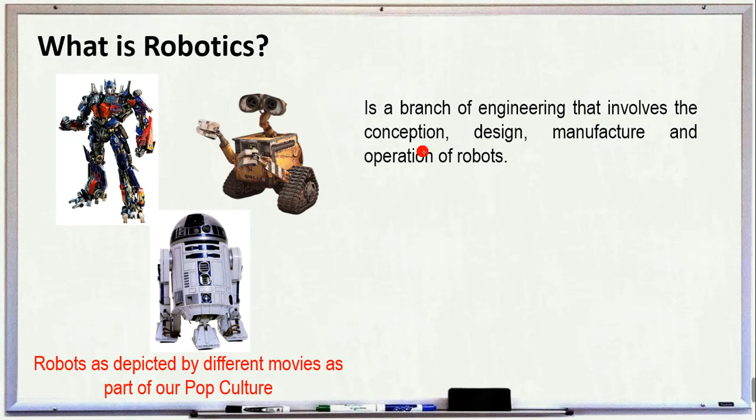But in an academic perspective, robotics is defined as the branch of engineering. So bago na siya, this is an emerging field. It is a branch of engineering that involves the conception, bali magplano, mag-conceptualize unsay porma sa ka robot, and then after conception, proceed ka sa design. So imo i-design ang iyahang mechanical structure, and then of course since most robots are electronics na siya, so imo pod i-design ang iyahang electrical systems and electronic systems as well as the control systems.

And after the design, if it is approved na, okay na siya, then proceed ka sa fabrication or pag-manufacture sa mga parts and also the assembly. And afterwards, of course, for the operation of the robots. So, ang kaninga field, mo niyang buhaton: the conception, design, manufacture, and operation of robots.

And the objective of the robotics field is to create intelligent machines that can assist humans in a variety of ways. So, in the early days, humans discovered and invented machines in order to make things easier and faster, unlike before nga manual ra kaayo, then very tiresome. And then kaning sa robots, very complex na, no? These are complex machines integrated with other fields like mechanical, electrical, electronics, computer systems, and so on and so forth, and also the control systems, so that mas mo unsa man mapataas pa iyahang level of intelligence.

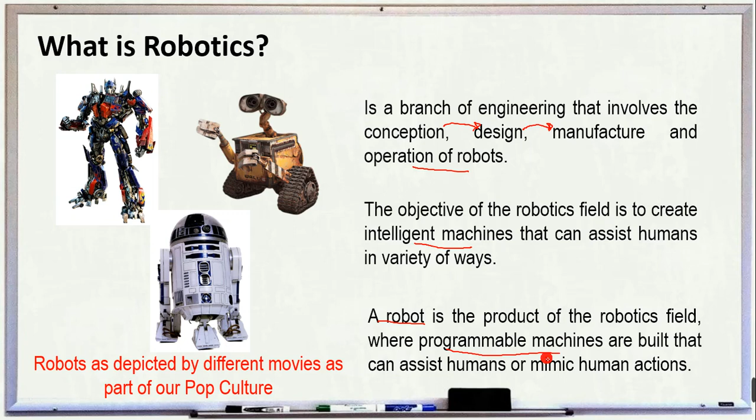So next, we already finished defining robotics. Let's proceed to the industrial robot. Actually, industrial robot is also one of the products of the robotics field. But industrial robot is very specific in the field of kanang manufacturing and in the industry.

That is why it is defined by the Robot Institute of America as a programmable multifunction operation for handling mechanical parts or workpieces. So, ang mga mechanical parts and other kanang mga workpieces, they are present in a certain manufacturing firm or in a certain industry. So, ang trabaho sa usa ka industrial robot or a special mechanical device that can perform various tasks, a wide range of task. It could be pick, then i-drop.

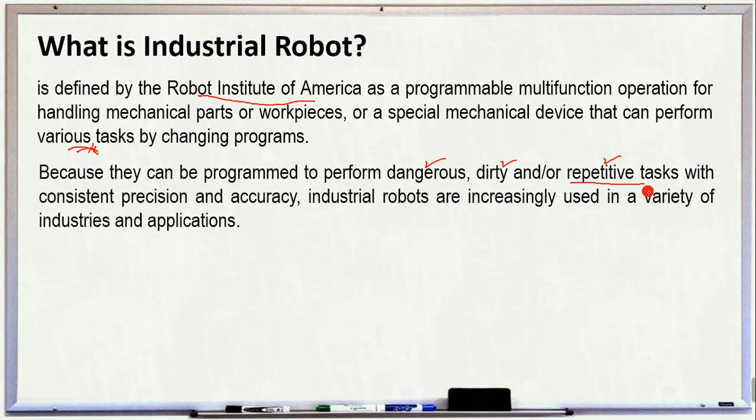This is not efficient for a human mindset, but for an industrial robot it is easy because it has no emotion or feelings. As long as it is given instructions, it will execute them again and again, as long as it has power and no damage to its parts.

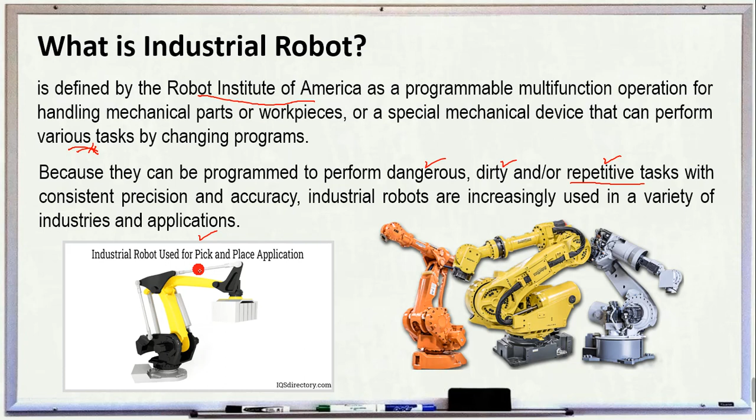Next, let's discuss the history of robotics. Although this is an emerging field, if we trace back its origin, it dates around 3000 BC, because around this era, mechanical devices were built to regularly carry out a particular physical task.

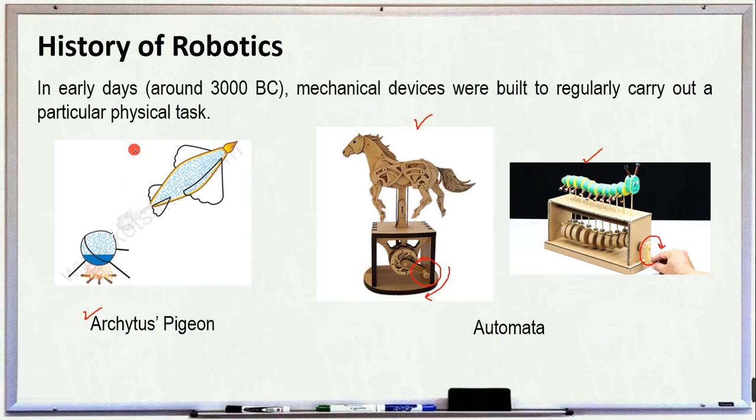So, diri ta sa modern era. In 1961, the first industrial robot by George Devol was invented. It is named as Unimate.

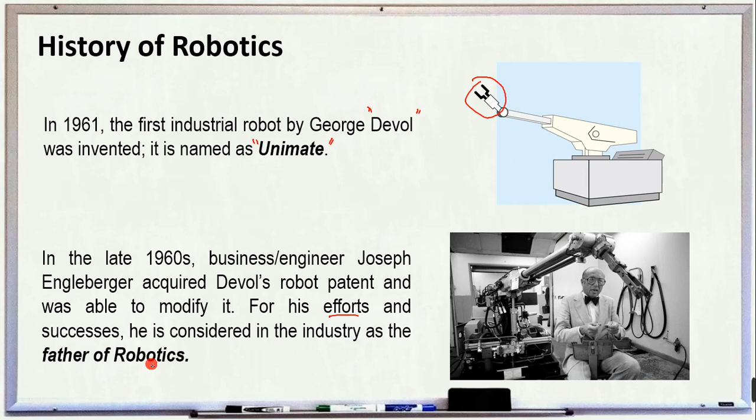Next, in the next decade, after that, si Charles Rosen from Stanford Research Institute led a research team in developing a robot called Shakey. Again, from Unimate, another discovery is Shakey. Si Shakey, mas advanced siya.

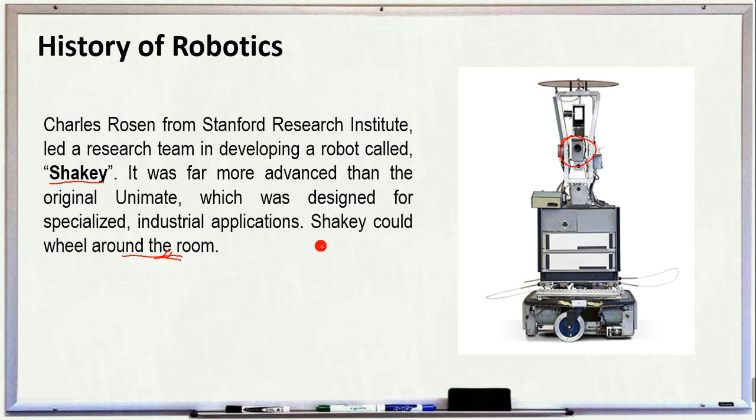So moving forward, proceed ta sa types of robot. So di ba? Usa sa mga example ato na discuss si industrial robot. That is for the industrial applications or in a manufacturing firm. But let's have another types, no? Daghan man siya. First is

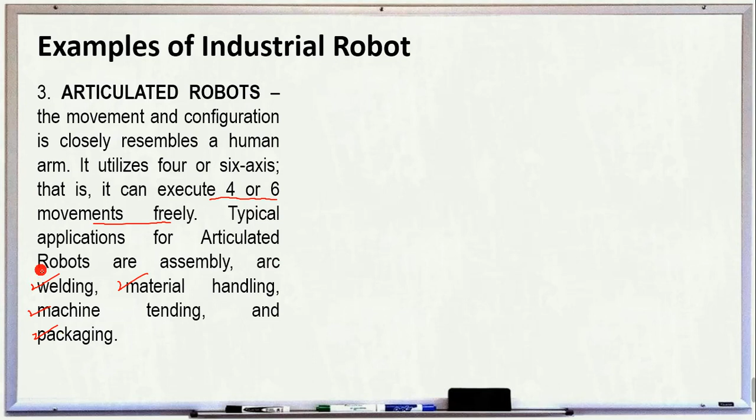Okay, six. So one is translational, and it's both translational and rotational. What are its typical applications? Since it has high degrees of freedom, it can be used for arc welding, material handling, machine tending, and packaging. You can position it anywhere because it has many degrees of freedom, just like our hands which have many degrees of freedom.

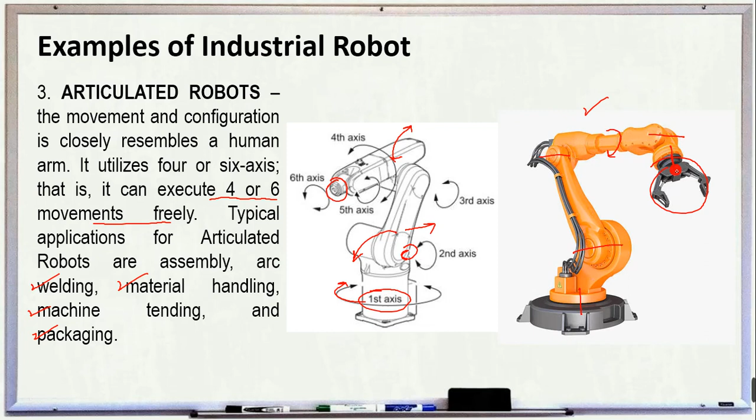Fourth, we have cylindrical robots. This one has a rotary joint at the base and a prismatic joint to connect the links. This prismatic joint's movement is translational only, meaning linear only.

So there's only two, because in cylindrical axis, all you need is the r, the theta, and also the height. So we have rotation, and we have a rotary joint, and a prismatic joint to connect the links, so that is our r dimension. Another translational dimension is the z dimension.

That's why it's called the height of the cylinder. So again, we have rotation, and we have two translational movements - that's for the radius or its extension, the extension of its arm, and also the height of the robot, which is the z-axis.

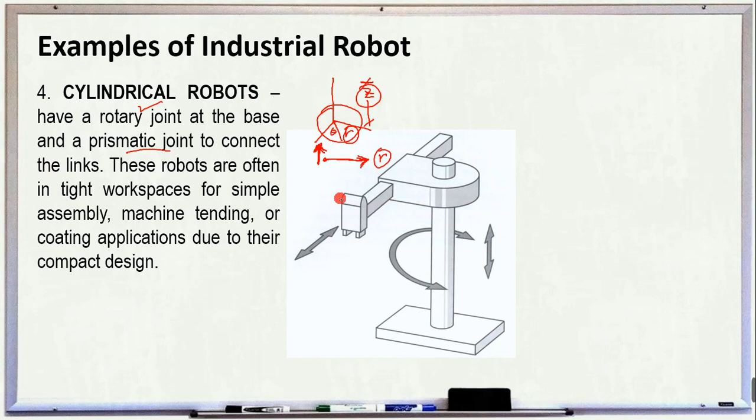So that's this one, here is its simple diagram. This is the base, and this is the end effector which can lower. So that's why it has a z-axis. And since it's cylindrical, it has rotation theta - this shaft rotates with respect to the base. And where is the prismatic joint - that's for the r, the extension of its arm. So it can adjust. That's why it's called a cylindrical robot.

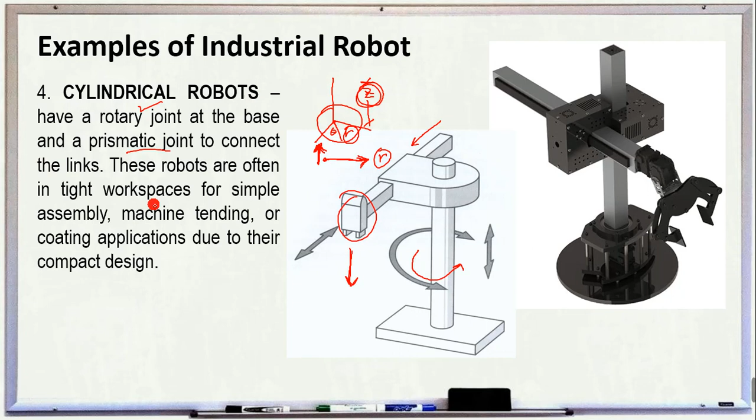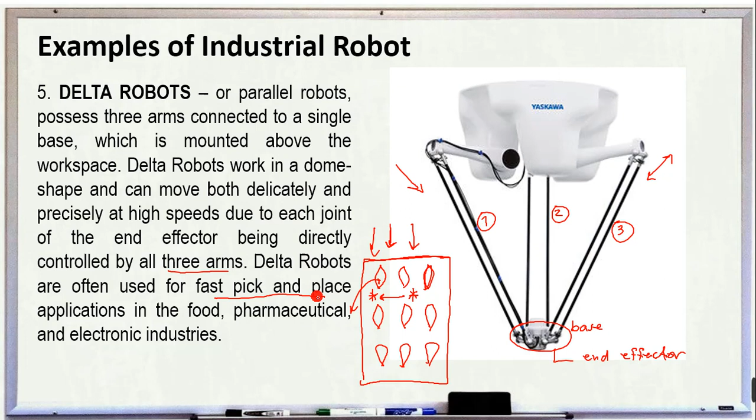Having none, let's proceed to polar robots. Polar robots, another term is spherical robots, have an arm with two rotary joints and one linear joint connected to a base with a twisting joint.

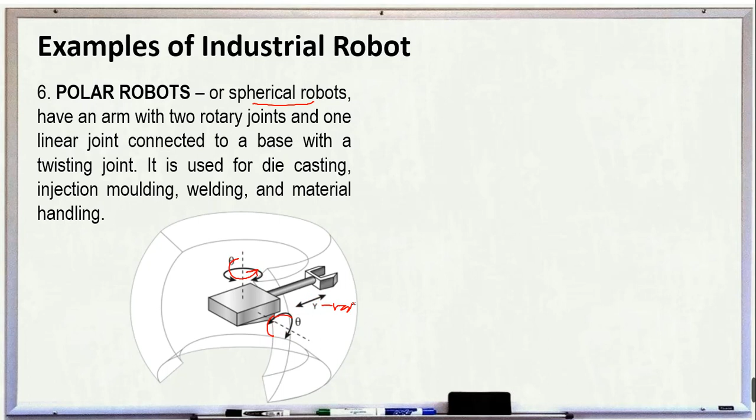Its movement is spherical - it can turn here, turn on this axis, and this represents the radius, since a sphere has a radius. So that's radius, this is the example of a polar robot.

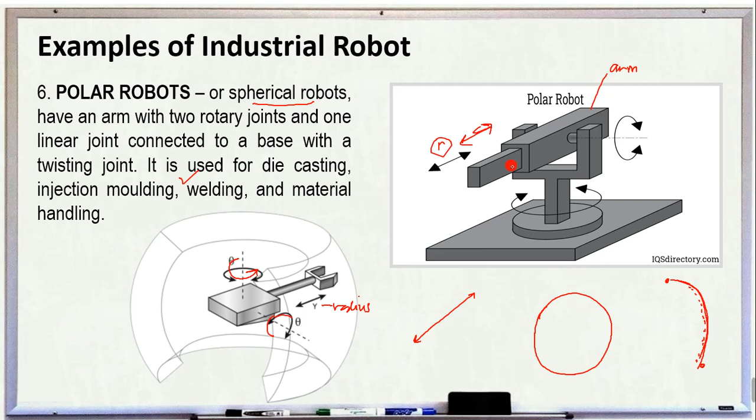You probably already know from analytic geometry the Cartesian coordinate system with x, y, and z - that's why we have Cartesian robots. We also have cylindrical coordinate systems with theta, r, and height - that's why we have cylindrical robots. And for spherical coordinates, we have 2 thetas and 1 r. That covers polar robots.

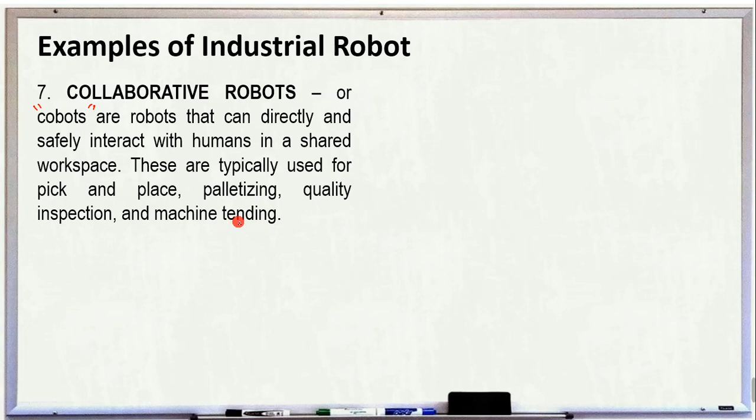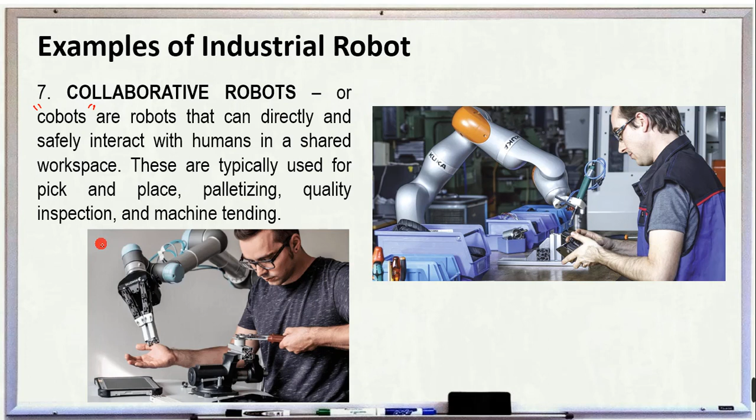Okay, so I think that's it for my discussion for today.